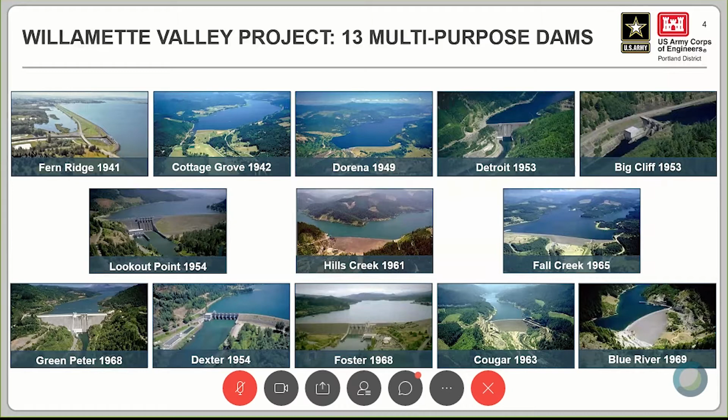So we're approaching our conservation season currently, and this is our goal for each project, to reach this elevation to provide this conservation storage to meet these other benefits: water supply, water quality, fish and wildlife, and hydropower throughout the dry summer and fall time frames. Eric described it as a delicate dance many times, and it is this dance between balancing flood risk and flood storage with the conservation needs that the region really depends on.

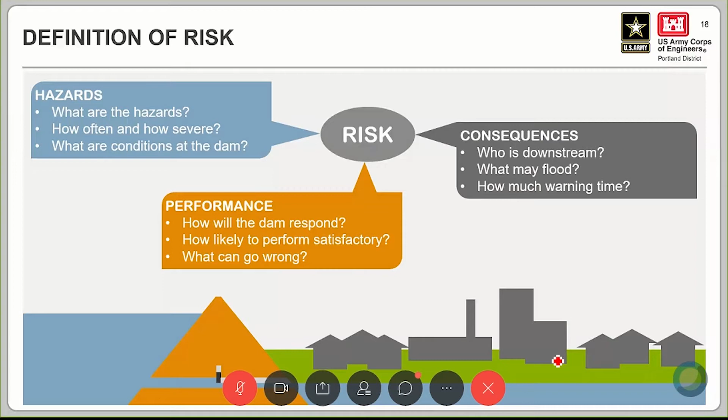We update those risk classifications based on various risk assessments. I talked about the routine risk assessment we do on a 10-year basis, and then at a national level, the advanced risk assessments called issue evaluation studies are prioritized, and we have several going on in the Willamette Valley. A couple of them are concluding and moving either back into the routine program or onto a dam safety modification study. The modification study phase is a chance to look at long-term solutions to reduce risk associated with the projects.

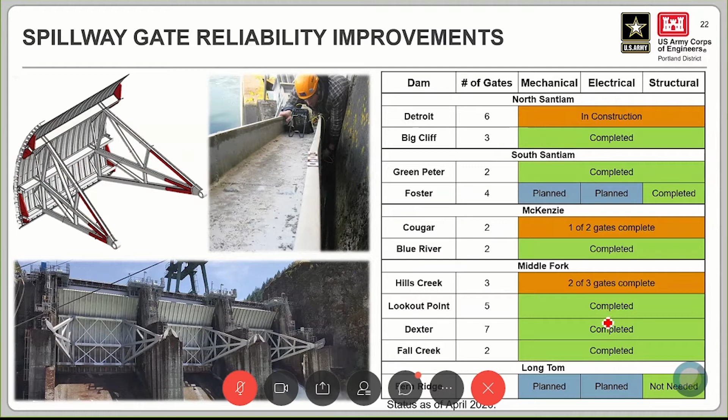There's a little bit of work to do at Detroit, Cougar, and Hills Creek, but at least there's partial completion. We have an ongoing construction project at Detroit right now. So we're working over the next couple of years to really finish all of these projects out, which is a real accomplishment for the district and for the projects and really the communities that rely on the infrastructure.

So interim risk reduction measures are a way that while we're going through the risk assessment process, we identify potential problems or issues associated with the dams. We can implement short-term measures or interim measures that reduce risk while we study the problems further or look for those long-term solutions in a modification study. And so I've listed some examples of those interim measures that we are taking.

Increased surveillance and monitoring of the projects at certain times and certain pool elevations and certain conditions. Planning and exercising our emergency plans is a key component in communicating risk to those emergency managers that we have relationships with, and also events like this to raise awareness with our stakeholders and the general public. Operational changes and restrictions are also included and considered as interim measures.

One example that we've implemented in the past related to spillway gates is these gate tracking restrictions, and these have been lifted as we've finished the rehabilitation of the spillway gates. And so what these measures did was reduce the probability of overloading those spillway gates and resulted in a loss of that available flood storage, and if we had flood events that would potentially put the spillway gates in danger, we would open them prematurely or release water sooner than we otherwise normally would.

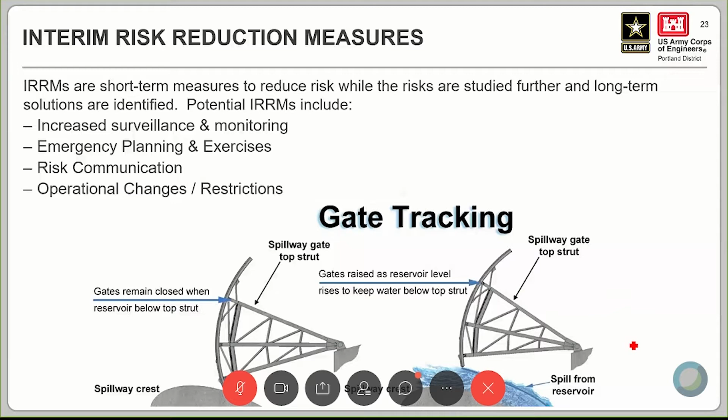showing the simplified cross-section of the dam and the earthen embankment that retains the reservoir. And you can see that the height of the dam, the scale is pretty close to true, but it's approximate, is about 341 feet. So the foundation of the dam up to the dam crest, or the top of the dam, which is set at elevation 1548. That's feet above sea level.

Normally, our maximum conservation pool, our target refill elevation, is at elevation 1541. So only 7 feet between the top of the dam and the top of the reservoir at its maximum elevation. And so there's a concern with really extreme seismic events, those well beyond the average expected Cascadia subduction zone, but within the realm of probability, that the ground shaking could result in some shaking of the embankment and a settlement and lowering of the dam crest.

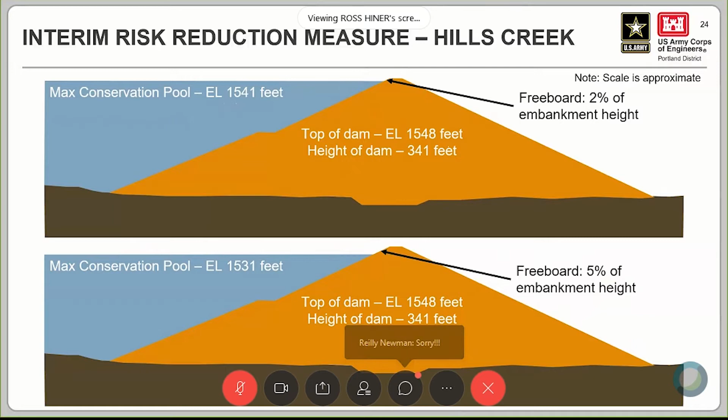At Lookout Point Dam, downstream of Hills Creek, we have more of a concern with the spillway gates and their seismic performance. We have upgraded and strengthened certain components of the gates for trunnion friction. However, the extreme earthquakes that we are assessing the dams for are seen to potentially overstress the gates and potentially the piers. And so our interim measure at Lookout Point is similar, to reduce the maximum conservation pool by 5 feet, and that reduces the amount of potential water on the gate during an earthquake to reduce those forces, and to give us a higher reliability and seismic performance of the spillway gates.

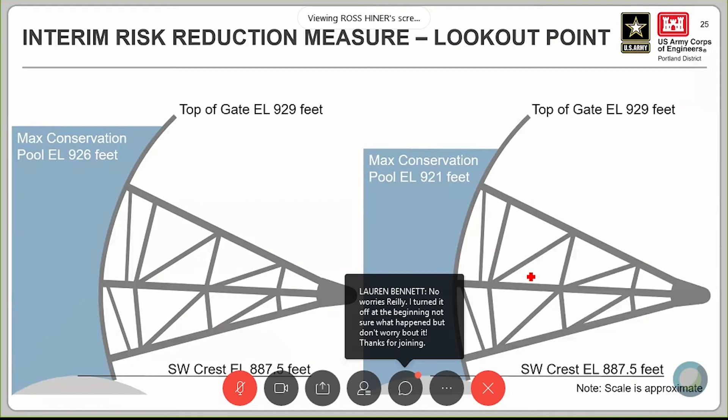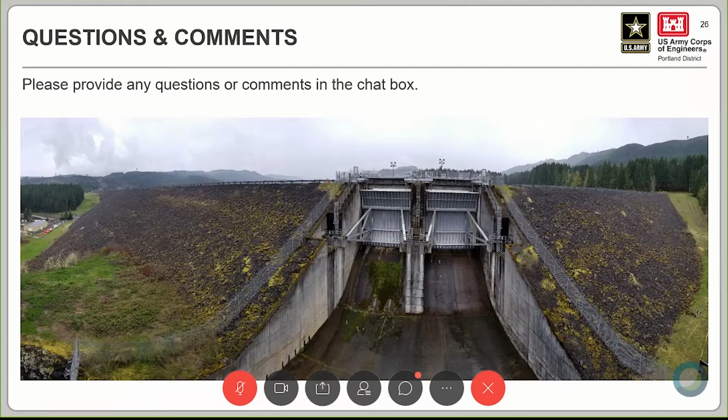So that concludes my presentation. I will now hand it off to Eric Peterson, Operations Project Manager, for an overview of this year's conservation season outlook. And also I'll be looking at the chat box to see if there's any questions that you have submitted that I might be able to address. So Eric, the presentation mode is coming your way now. Thank you all for your time and attention today, and take it away, Eric.

All right. So, Lauren, let me do a quick sound check with you. Can you hear me okay? Can hear you great. And my desktop is up?

Yep. Great. Well, Ross, thank you for your comments and overview of the dam safety program. I really appreciated your description of the system and how it's supported by the dam safety program.

Our dam safety program obviously is incredibly important, and we need the kind of objectivity and clarity that you provide. And our dam safety program helps us understand and make well-informed decisions around both managing risk and making investment of public dollars. People's lives and our regional economy really depend on solid risk-informed decisions, and we are really fortunate to have one of the best dam safety programs in the nation, and fortunate to have Ross here with us managing that program.

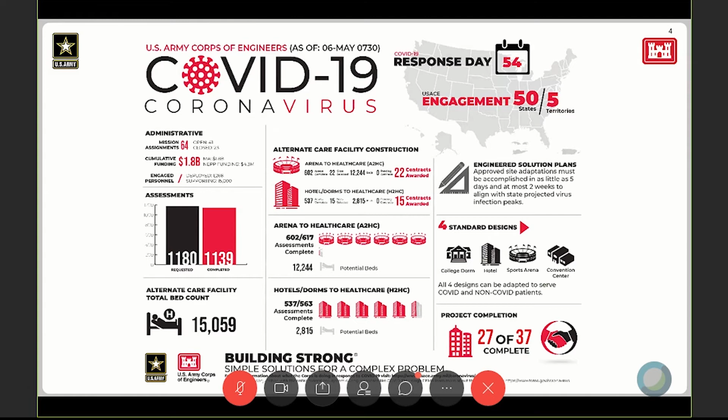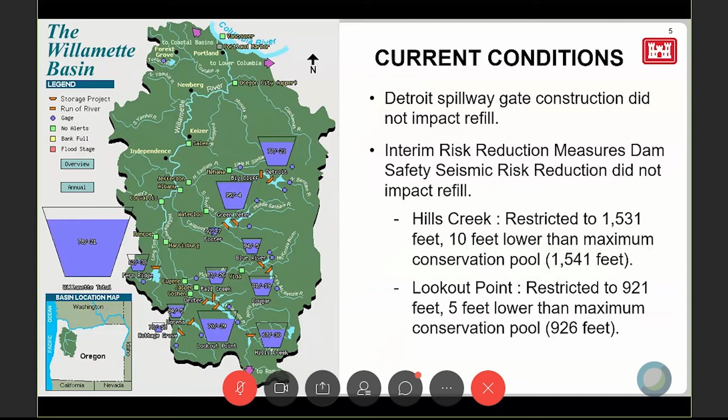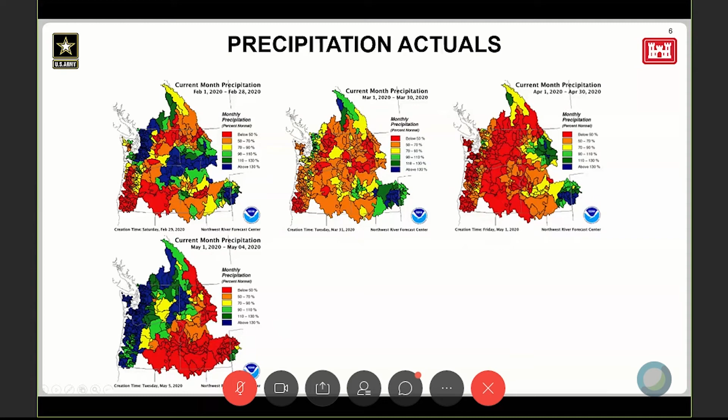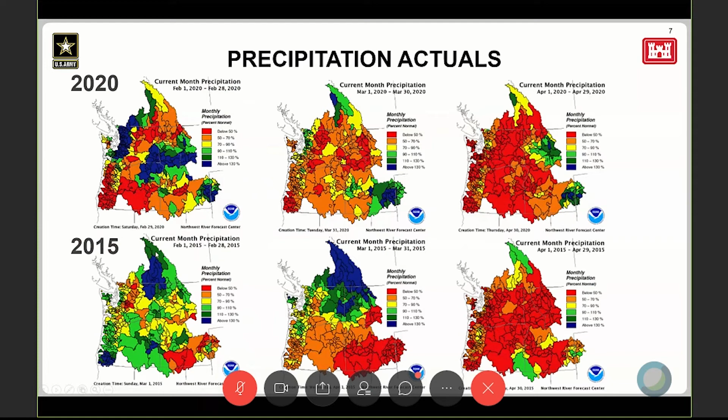To do a little comparison between 2020 and 2015, you can see that each of the months, February, March, and April, really have been either comparable or drier in 2020 than they were in 2015. And 2015 was a pretty rough water year. We didn't have a lot to work with in 2015. The difference for us in 2020 is that we had better snow water equivalent. We had more snow, and while this is very much a rain-driven system, not a snow-driven system, the snow has helped us out this year.

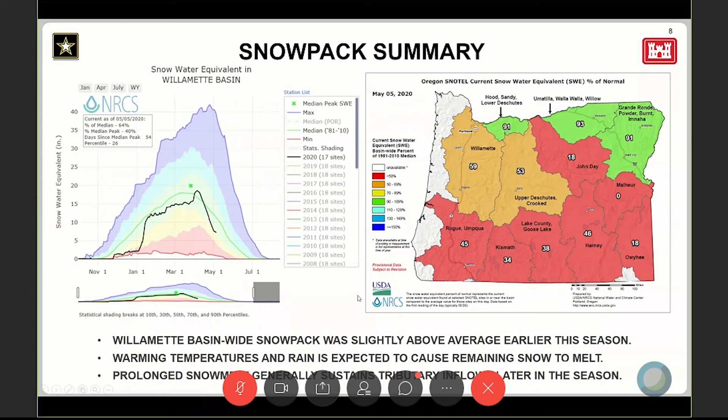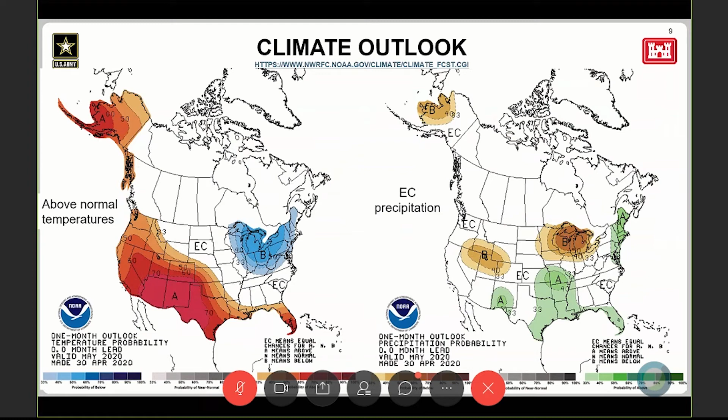It's not going to have a lot of bearing on the rest of the spring season refill as we move forward. The climate outlook, the longer term outlook, appears to be warmer through May with an equal chance of either above or below average for precipitation. Again, going to be hot and sort of average precipitation, we don't know. Where that puts us is really in severe to moderate drought across the basin.

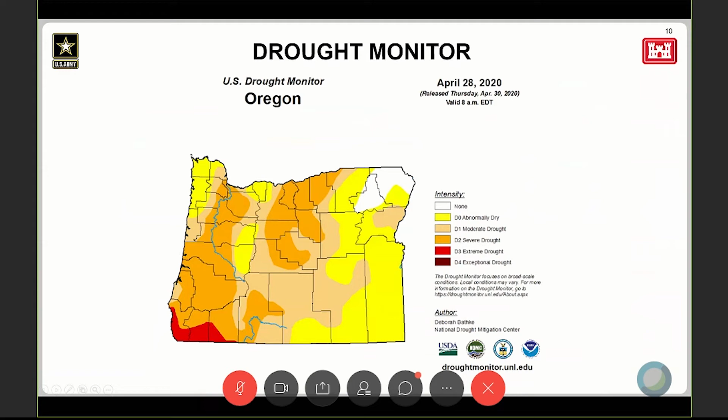So to recap a little bit and then relate this to flow management, we collaborate with the Bonneville Power Administration, the National Marine Fisheries Service, U.S. Fish and Wildlife Service, Oregon Department of Fish and Wildlife, and other stakeholders to manage this system to meet the 2008 biological opinion we have for salmon and steelhead. And that biological opinion helps define some objectives for conservation season releases for water quality and for fisheries habitat.

So this year, as you saw through the maps and the precip conditions, it's been a difficult water year, difficult start. Conditions have been marginally improving with a little bit more rain coming a little bit later, and with that having some positive bearing on the snow water equivalent coming off. A lot of variability in the system. The South Santiam is in pretty good shape. The North Santiam is in better shape. The McKenzie subbasin is not rough, but the south end of the valley, particularly the Middle Fork and the Long Tom, have been pretty heavily impacted by drought.

In order to achieve as much storage as we could and balance some of the trade-offs between capturing that water and refilling some of these reservoirs for use of that water later in the year versus using that water right now to sustain flows, working with partners, we made some trade-offs. And in the Willamette Valley this year, we had no main stem water quality targets in April, partly because the water coming in was cool. We had a little cooler spring, and that was helpful. And then we had some modified main stem targets in May.

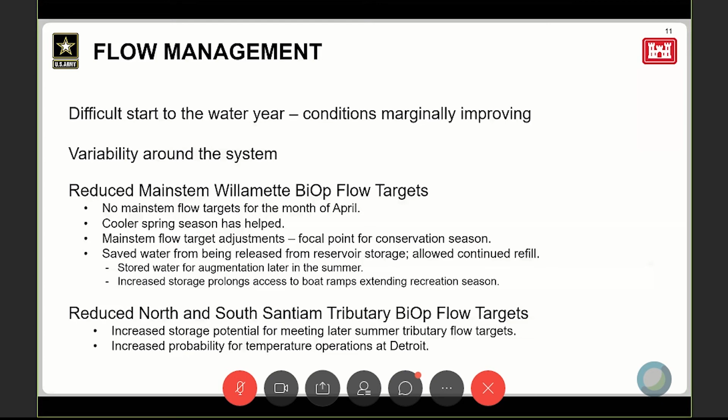And as a consequence of that, instead of having about 900,000 to 1 million acre feet of storage in the system, we'll be able to achieve about 1.2 million acre feet of storage by May 15th. And that's really good. That's positive. That will allow us to use that water later in the summer as both tributaries and main stem Willamette River flows get warmer, and we can improve both habitat and water quality a little later in the season because we made those trade-offs early with our partners. We really have an adaptive process, and we meet multiple times a week informally, and then once a week formally with all of our partners.

Again, just to recap, we had no augmentation for April main stem Willamette flow targets. We had reduced BiOp minimum tributary targets, 1,100 CFS on the South Santiam, 1,200 CFS on the North Santiam. Both of those would ordinarily be about 1,500 CFS for April. And in May, we've adjusted May main stem flow targets based on conditions. So in May, we'll have a rolling average of 15,000 cubic feet per second over a 7-day average, and a minimum hard lower limit of 13,000 cubic feet per second. That's less than where we would ordinarily be.

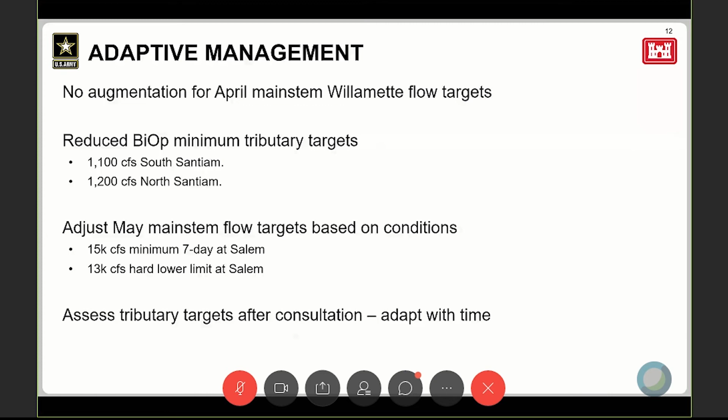We'll continue to assess tributary targets and consult with our partners, and based on what we need to do given conditions to optimally adapt, we'll work to optimize the water that we have available this year. Again, a pretty good outcome, 1.2 million acre feet by the middle of May for what would ordinarily have been a really horrible storage year.

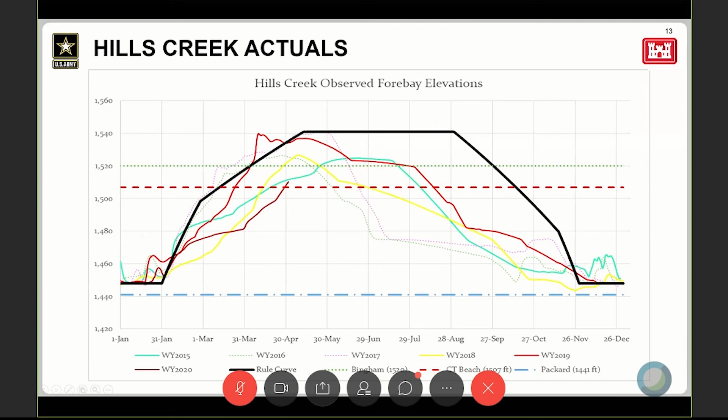Let's take a look at actual hydrographs of reservoir forebays. Starting up the Middle Fork, this darker red line is actual for 2020. And you can see that we're about where we were in 2015 at Hills Creek, although the rate of rise is steeper at this point in time for Hills Creek than it was in 2015. This just gives you some comparison to where we've been in other years. Lookout Point, similarly, we're above where we were in 2015, a little closer for Lookout to where we were in 2018, and the rate of rise is still a little steeper than where we were in 2018.

Again, 2015, if you think back, that was a pretty horrible water year. I remember on New Year's Day that year hiking up on Willamette Pass, snowshoeing into the Maiden Peak snow shelter and spending the night there. And that was the last time that we went snowshoeing that season in 2015, because it seems like after that weekend, the snow came off and we didn't get any more snow really at mid elevations for the rest of that winter.

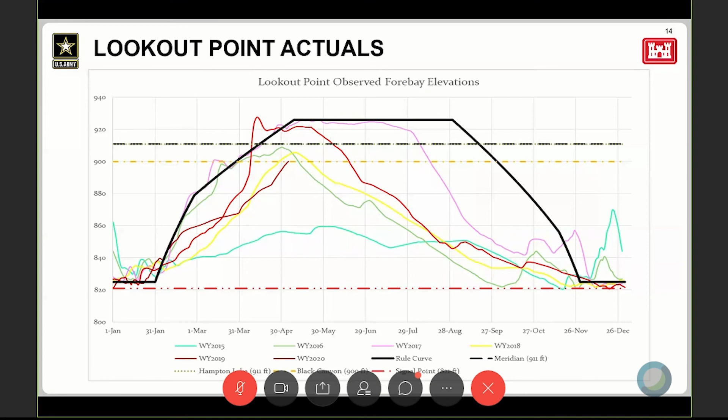Fall Creek, better than 2015, not quite what it was in 16, but still climbing there at Fall Creek.

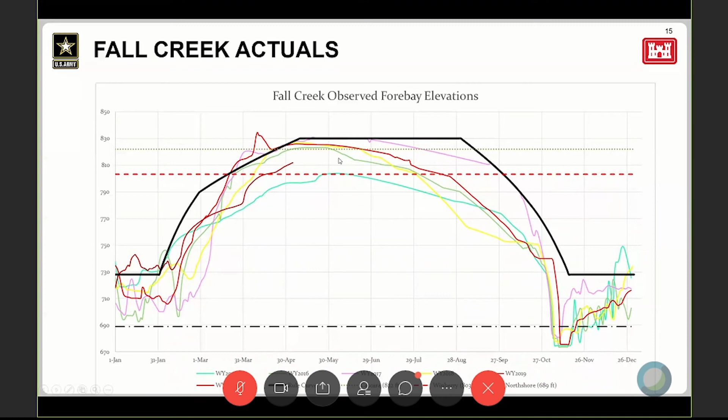Fern Ridge, this is unusual. Fern Ridge, we typically don't have a difficult time refilling because it's a fairly shallow lake, not a lot of volume of water there. But this year we're having a difficult time refilling Fern Ridge. Conditions in the Long Tom watershed have been drier than the rest of the system, and our refill season has been worse than in 2015.

We've been at minimum outflows, 50 cubic feet per second, since early February, which is really remarkable. I've been in the Willamette Valley since 2004, and I don't remember a time that we've been that dry at Fern Ridge.

This week we made a decision to throttle back our releases from Fern Ridge Dam to just 30 cubic feet per second, and that's below our ordinary minimum flows. Again, we did that in partnership with the resource agencies, which is how we make decisions.

We may get some additional rainfall this next week that could help out a little bit. I continue to watch the forecasts, and it looks like it may be a little damper, but we're going to need a lot more rain than a few days of showers in order to recover from where we are right now. So I'm not optimistic that we're going to refill at Fern Ridge, nor am I pessimistic that there won't be recreation opportunities there. There will be.

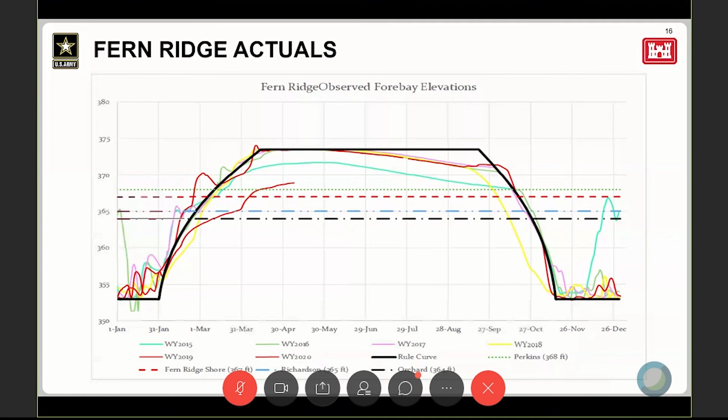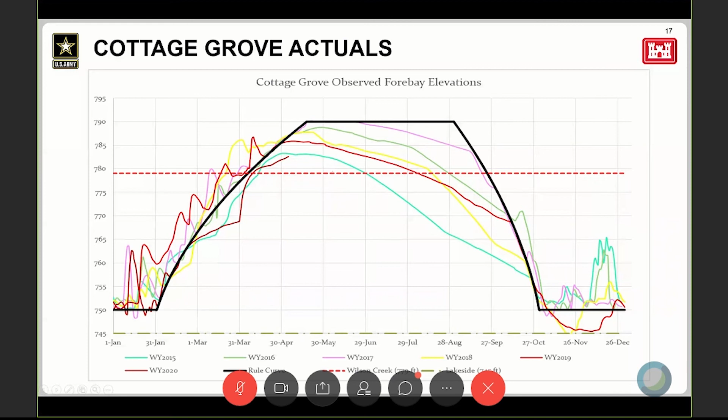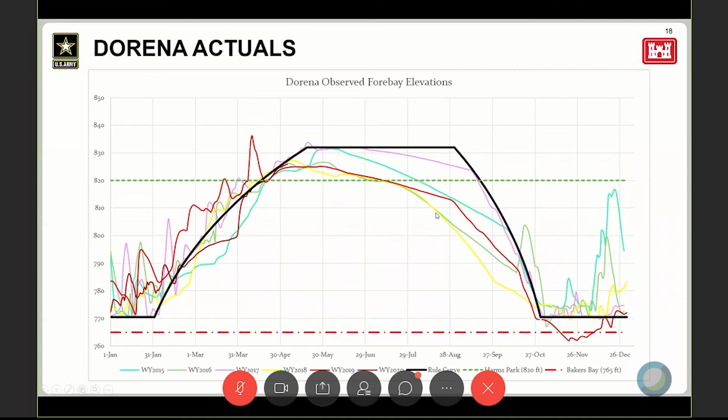Cottage Grove, we're a little bit below 2015. You can get a sense of where recreation facilities are available there. Wilson Creek is the flat line elevation there. Dorena is one of our flashier reservoirs, and we're right up on the water control diagram there, or just off. So Dorena looks pretty good, and Dorena is typically a facility that refills pretty easily and frequently.

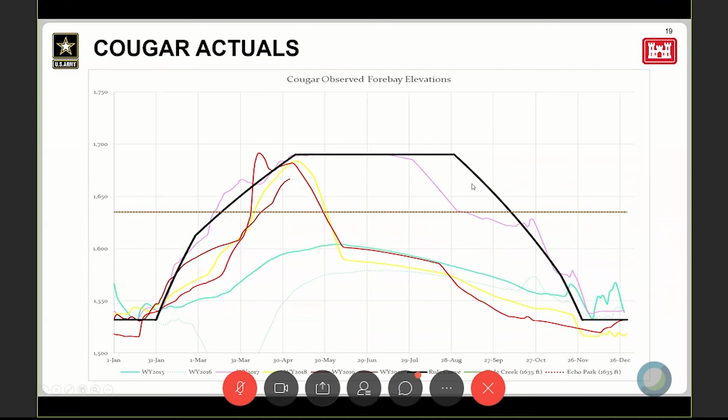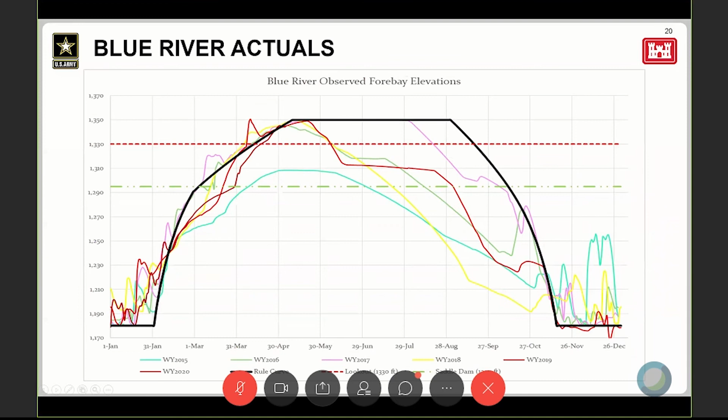Cougar, we've got a pretty good trajectory there for refill. Blue River, similarly, we're up near the water control diagram where we should ordinarily expect to be, and those just reflect different conditions of the McKenzie subbasin this year for precipitation.

If we used storage from Foster to augment flows, we would only get a few days of water available to us to do that. There's not a lot of benefit there, and that water is beneficial for other purposes.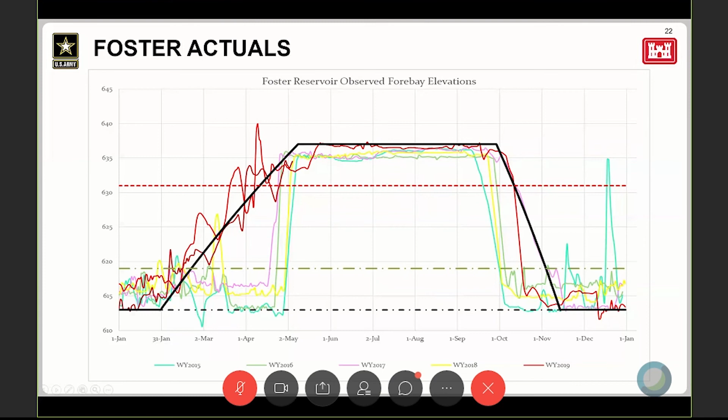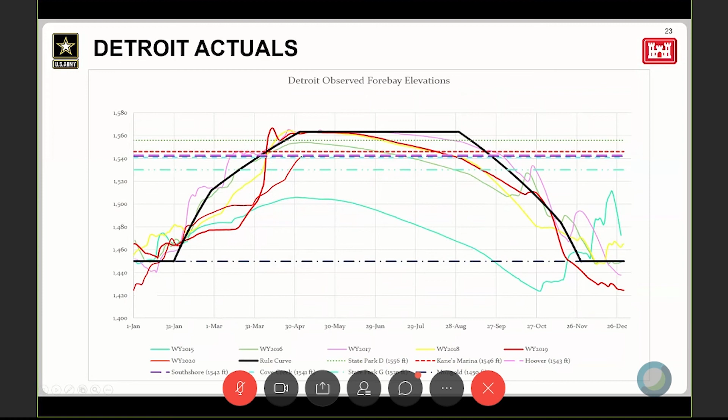So, Detroit, very popular recreation reservoir. We've seen improvement in our forecast over the last couple of weeks, and it has benefited from some of the snow coming off of the hill, and so we're optimistic that we'll get closer to filling at Detroit. I'm going to go into some of the modeling for the rest of the season by reservoir, and so we'll talk a little bit about what we expect to see in more concrete terms.

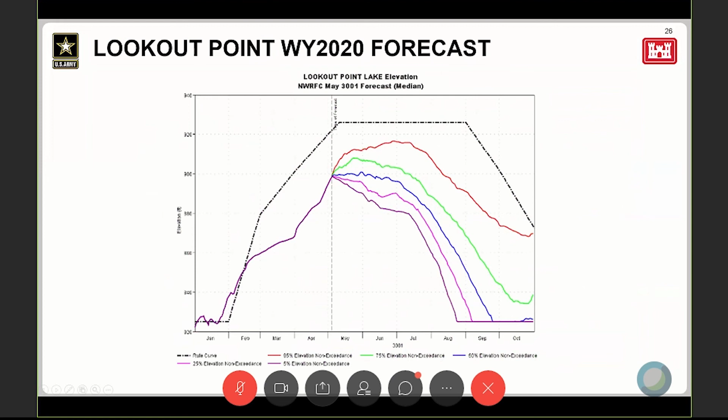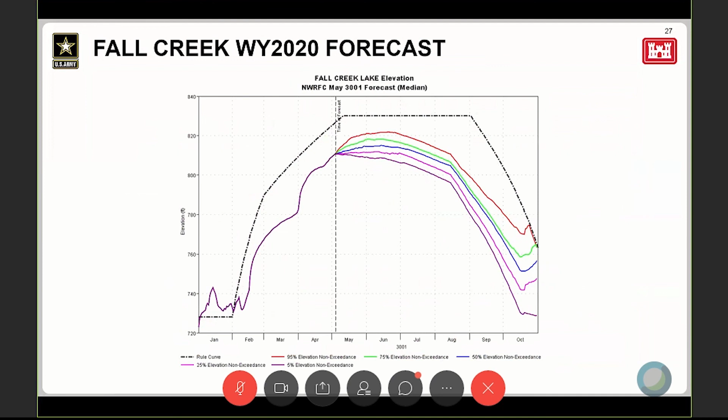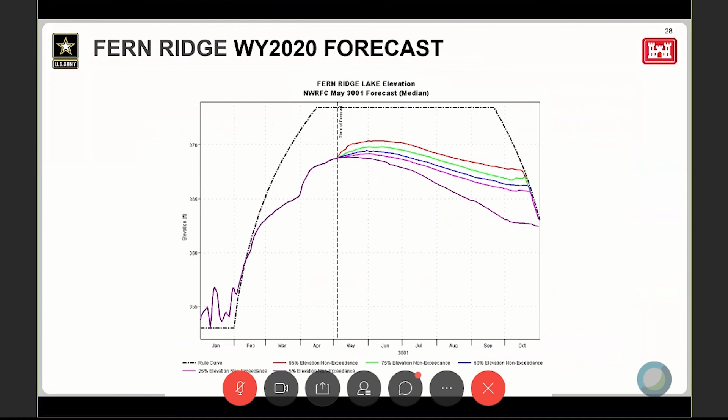Forecast for Fern Ridge, again, we'll approach 370 or so, and then begin to gradually taper off. Expect to see a reasonable utilization of water there for the conservation season and recreation opportunities there as well. Cottage Grove, going to rise and then begin to diminish there. Cottage Grove is a fairly small reservoir, and so it doesn't produce great benefits for the overall system and main stem Willamette water quality goals.

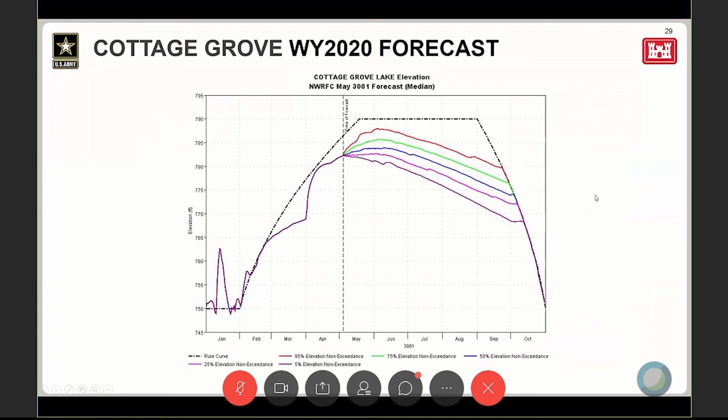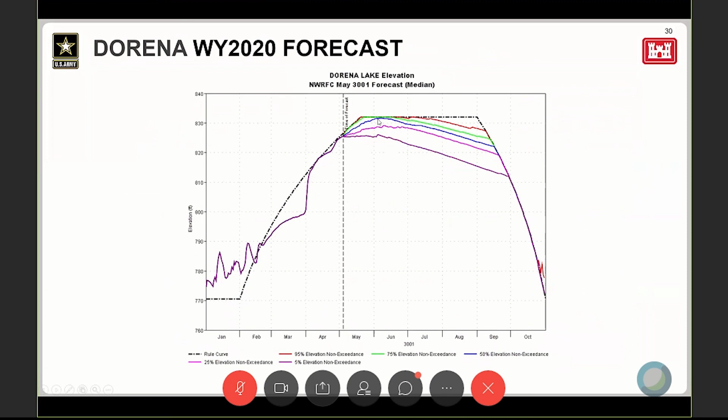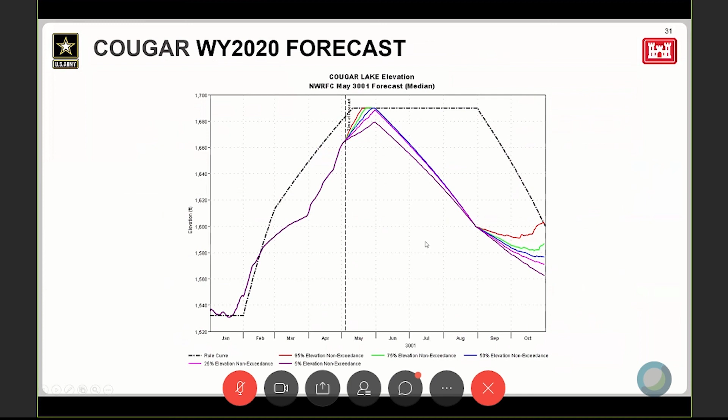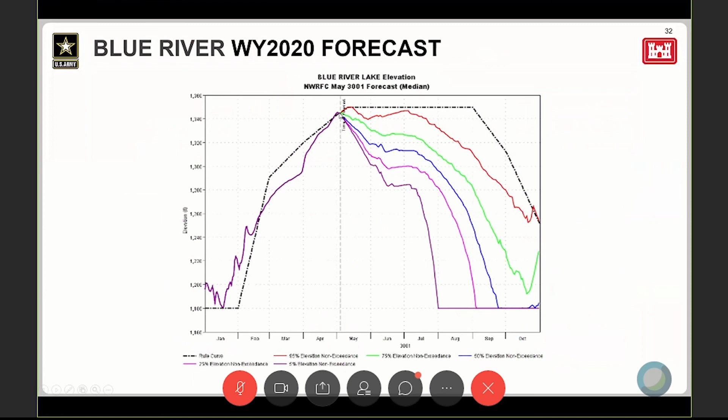Dorena looks like a pretty good conservation season there. Anticipating getting very close to filling in June at Dorena. Cougar, you can see refill probability is strong, but we'll use Cougar to augment flow for the South Fork and main stem McKenzie, and then also for water quality on the main stem Willamette fairly early, so it will be aggressively drawn down. Blue River, similarly, will peak somewhere fairly close to full, and then begin to pull that water for downstream use.

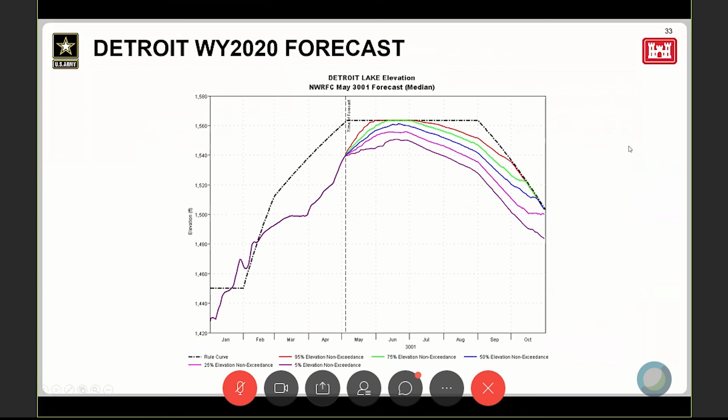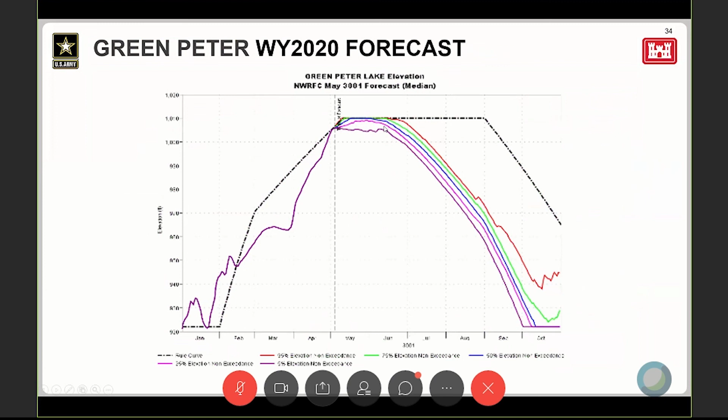So I ran through a lot of graphs really fast. It is important for you all to remember that every water year is unique, and that our forecasting has limitations, and that we can be thrown anomalous events like the atmospheric river that we had last April, which was fairly unprecedented for that water year, precipitation coming at that time of the year. But you know, every year is different, and we can have situations that are anomalous that impact us in different ways. So recognize that.

Our adaptive management this year has improved system storage projections. That's a really good thing, and I applaud our water managers, our biologists, and our partners for being able to come together and work out solutions that better optimize water resources and stored water for this season. Timely precipitation and some snow melt runoff is improving our forecast. Some basins obviously are going to be more impacted than others. The Long Tom and the Middle Fork are more heavily impacted by drought than other parts of the system.

Our flow targets remain under constant assessment, and we'll continue to manage adaptively through the course of the season. And it's our intent as well to communicate as forecasts and flow conditions change, to communicate those changes with you and to help you, our stakeholders and partners, understand what the trade-offs are, why we're making them, and what the path forward ahead looks like.